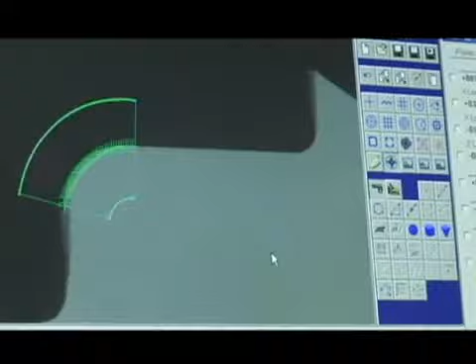Last week we met with John Hammond of Indicate Technologies in Santa Clara, California. John demonstrated for us the capabilities of a multi-sensor vision system. This week, John shows us an entirely different type of vision system.

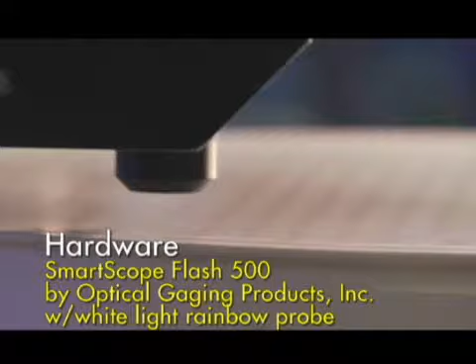This machine here is the SmartScope Flash 500, manufactured by Optical Gaging Products out of Rochester, New York. It's equipped with a special microsensor that we will see the results of here, and we'll also be looking at the TrueMap software by TrueGage that allows us to do some surface metrology analysis.

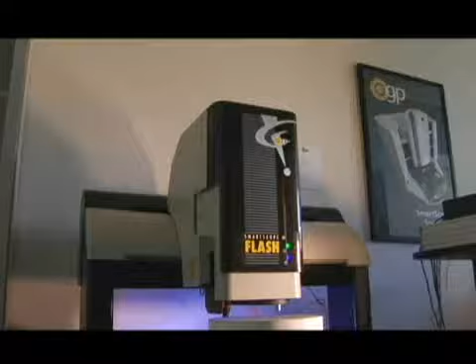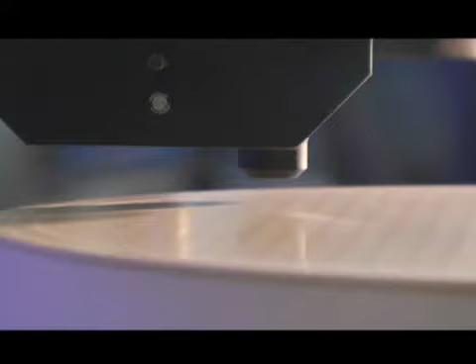What we're going to look at today is kind of a unique application for this particular product. This is a... well, you tell me what it is. Well, it is interesting in that we're using the SmartScope Flash 500 with the Rainbow probe to measure an electrostatic chuck for 300 millimeter wafers. These chucks hold wafers during their processing.

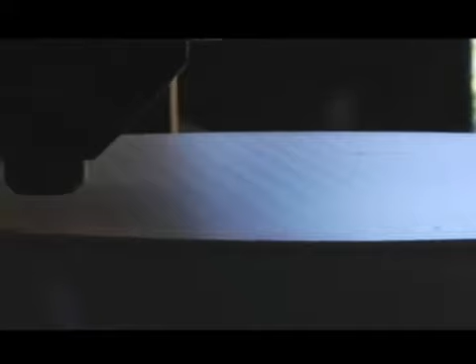We can see the surface of this, and it looks like there's very small raised pads. The top surface of the raised pads define a surface where the wafer will be pulled against. The concave or void area next to the pads is generally called the field. The parallelism of the plane establishes how flat the wafer will be held, and the coplanarity between the top of the pads, which are called mesas, and the field below affect how well this wafer will be held in place.

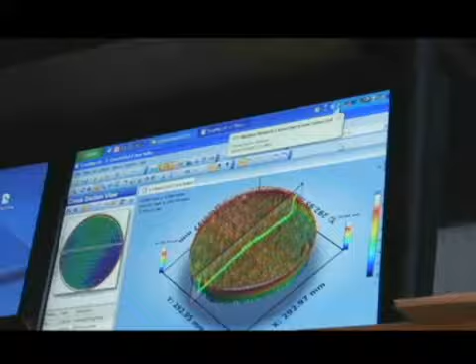And I'm assuming, it being a semiconductor wafer, that it's important that it be held pretty darn flat. The flatter the better. This particular application is for a local customer here who is in the business of manufacturing electrostatic chucks as well as reworking electrostatic chucks that have been out in the field. The task at hand is actually during the rework process, and the idea is to know where the chuck is from a flatness and coplanarity standpoint when it comes in, do the rework process, and then re-verify it on the way out before it's shipped.

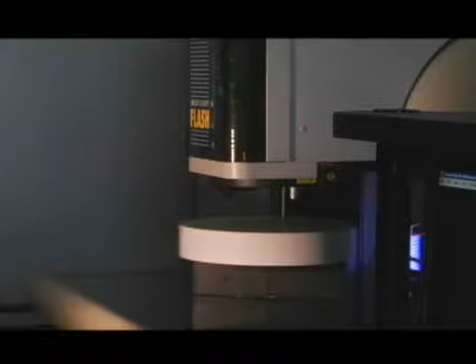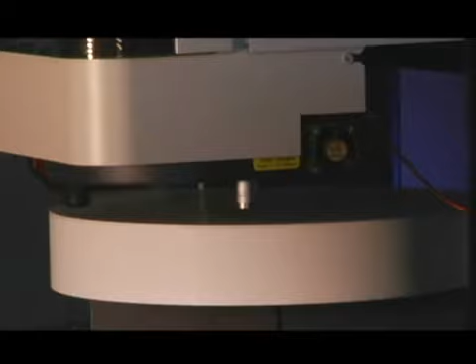Well, step us through it. Let's see what we got. Okay. The instrument itself over here with the electrostatic chuck is set up on blocks. We use the vision system to locate the exterior of the chuck, so that our scans with the Rainbow probe are done in a precise location. And then the Rainbow probe does a series of concentric circles, scanning, collecting in this case hundreds of thousands of data points across that chuck surface.

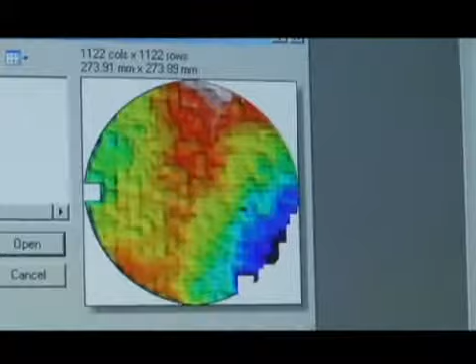And once that's accomplished, we have taken the data into another software package, which is, in this case, TrueMap by TrueGage. This is a surface metrology package, so this gives us the ability to do further detailed analysis of the surface of this chuck. This particular image that we're looking at here on the screen is a 3D representation of the chuck surface with the pads as well as the field.

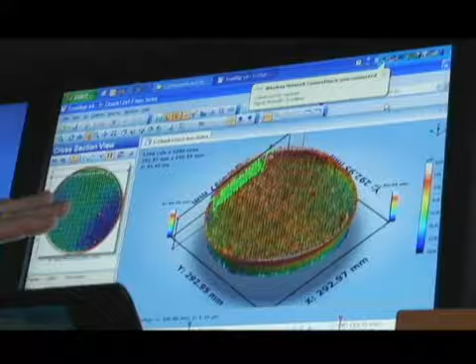Let me interrupt you for just one second. Let me make sure I understand. You're saying the first thing that the SmartScope Flash did was use its vision capabilities to define the perimeter of the chuck. Is that what it did? That's right. Okay, and then using that allowed it to orient itself in preparation for the scan with the Rainbow probe? Yes.

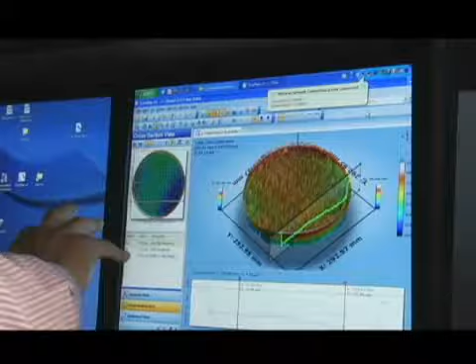Well, first of all, the software is cycling through this topographic map. Now, over here on the left, we see a top view of the data acquired from the Rainbow probe on the SmartScope Flash 500. And through the colorization, we can determine some height information. On this section over here, there's a color bar, and that has numbers associated with it, in this case from positive 6 microns down to negative 28 microns. So that's the range of surface data across this chuck, including the top surface of the mesa as well as the bottom surface of the field.

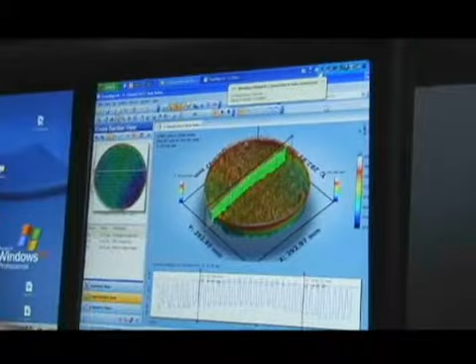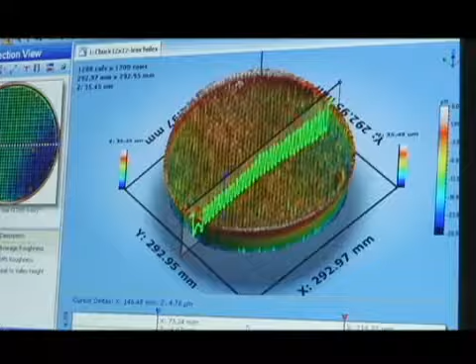So it looks like we have like a little hump. Yes, we do. We have kind of a saddle effect or a potato chipping of the top of this chuck. We have this cycling through each cross section, and we see a cutaway view of that here on the bottom of the screen. Let's pick one particular cross section here, for example. If we were to use our eye and our imagination to look across the top and connect the tops of these surfaces, that would describe this cross-sectional view of the mesas or the pads. And if we were to look across this bottom section here, that's going to describe the surface of the field.

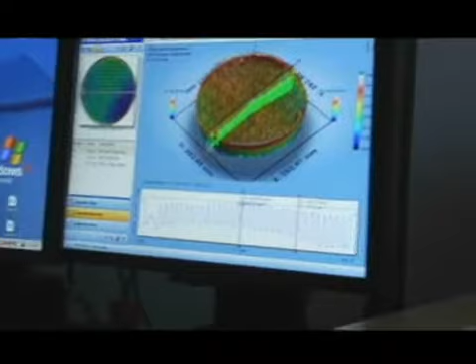By the way, how out of flat is this? We see this hump here, but how big of a hump is that actually? By positioning these cursors, we can make that determination. Position one at the high point, and maybe come over here to this side piece, and we can tell the Z delta here is about 6 microns. So, not much. Not much. About 2.5 tenths of a thousandth. Okay. So even though that looks large on the screen, it's really a very small amount.

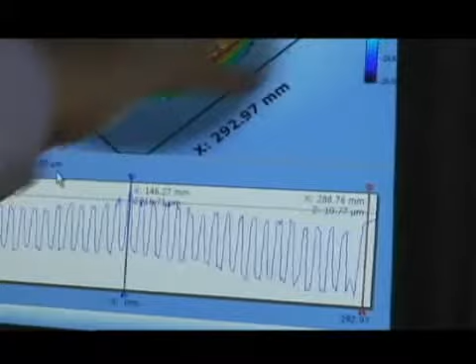And how long did it take to do this scan and come up with this data? This scan is very dense. It took about 30 minutes to complete the entire scan. Okay. Well, that's a very interesting application.